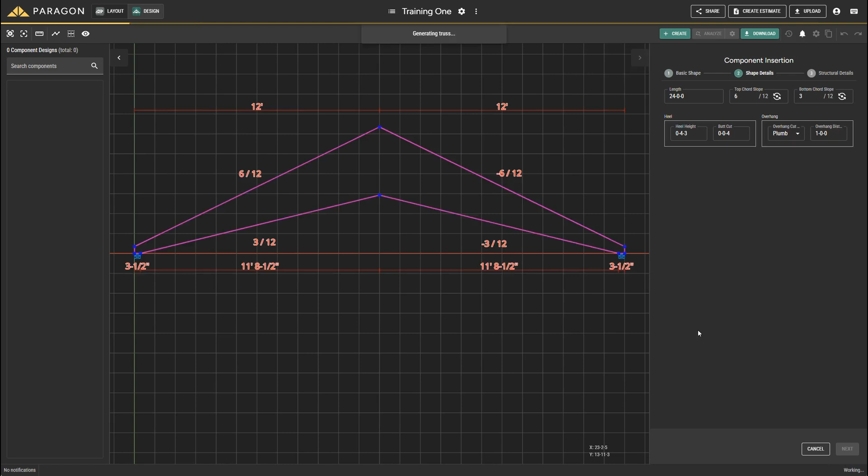Let's get started by opening the component creation panel. We'll select the scissor truss as a starting point, and use 24 feet for the length. We're going to change the top chord slope to 8/12, and set the bottom chord slope to 4/12.

Press Next and insert the component. We'll run a quick analysis, but it should pass. This is a simple example that you would commonly see in a vaulted room.

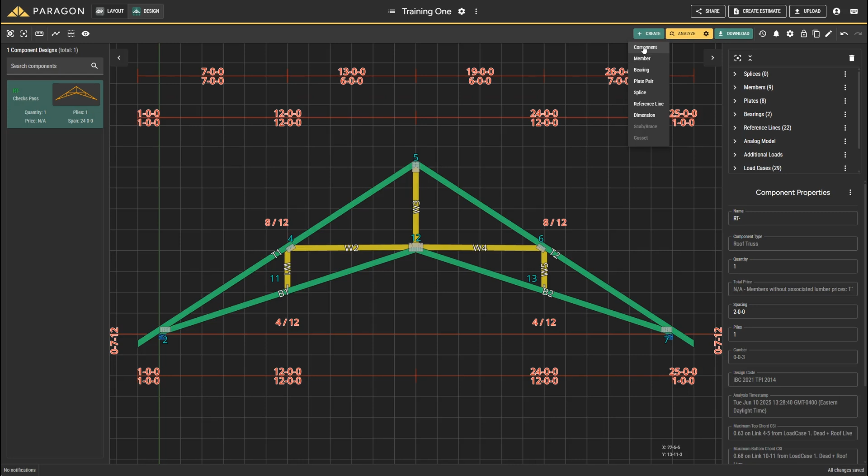Now let's walk through a more complex situation that has a vault and an elevated bearing on one side. Click Create and select Component. Here we will make sure the length is set to 24 feet.

Next, enter 12 feet to create the line, and we will set the slope to be 8/12. Press Add Line, then followed by a 12-foot line with a -6/12 slope. Click to add this line.

For the bottom chord, we want to insert an 11-foot, 8.5-inch line, then set the slope to be 4/12. Click Add Line. Next, we will click Close Profile.

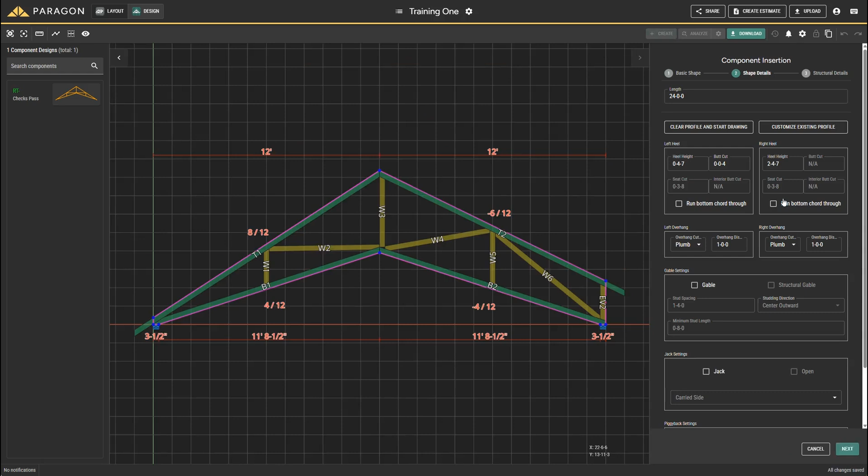We are going to set the right overhang distance to 0 in the Shape Details panel. Then click Next and Insert to wrap this part up.

Great! Now that we have this truss inserted, we need to make some modifications to get our elevated bearing. We need to remove the items that are labeled W3, W4, W5, W6, and EV2.

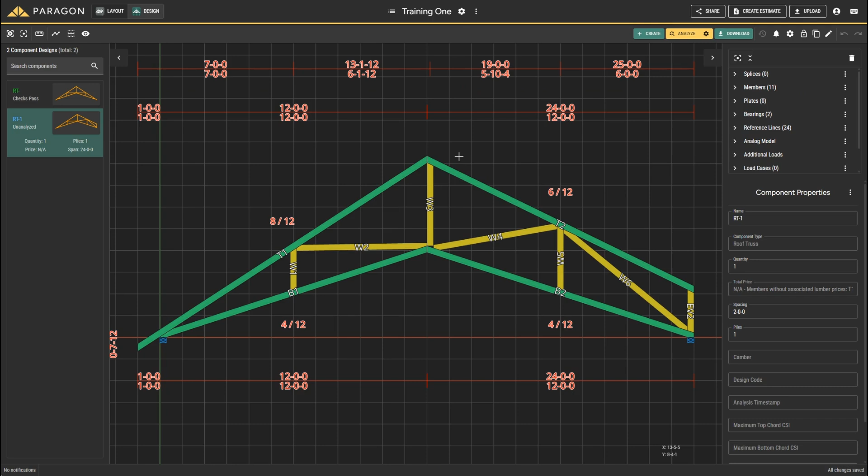Note these labels, as member labels will change as others are deleted. Remove the noted items from the component.

With those members now out of the way, we will add a horizontal member towards the right end of where T2 intersects the inside reference line for the right side bearing, and then connect to B2.

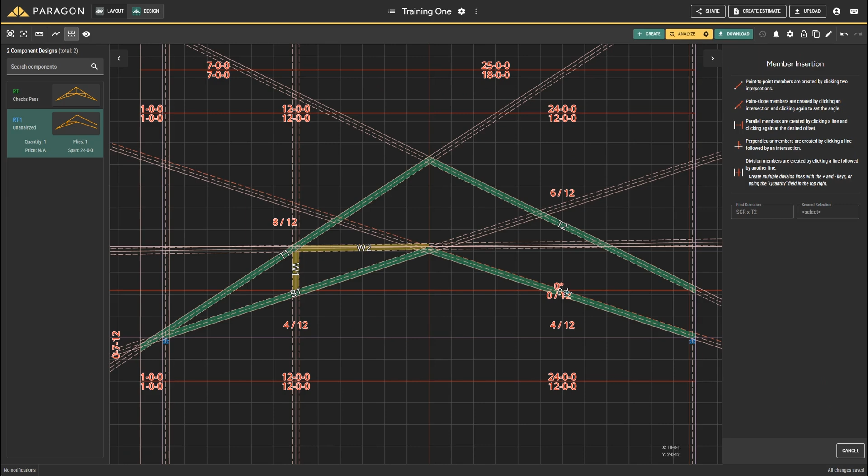Now we will insert a vertical member at this new intersection up to T2. If needed, fix the cuts so the splice is below this member.

Now we can add a member from W2 to where the inside edge of W4 intersects with T2. Next, wrap up the webs with a vertical at the center. After you start the member tool, double-click on the reference line to place it automatically.

Now we need to update our right bearing. This is an important step. If the member is not specified to be a bottom chord, bearing placement will not be possible.

To do so, convert W3 to a bottom chord. Select W3 and in the Member Properties info field for member type, set it to bottom chord.

Next, we will clean up the truss. We will trim the new bottom chord to the center of W4 by pressing Shift while clicking.

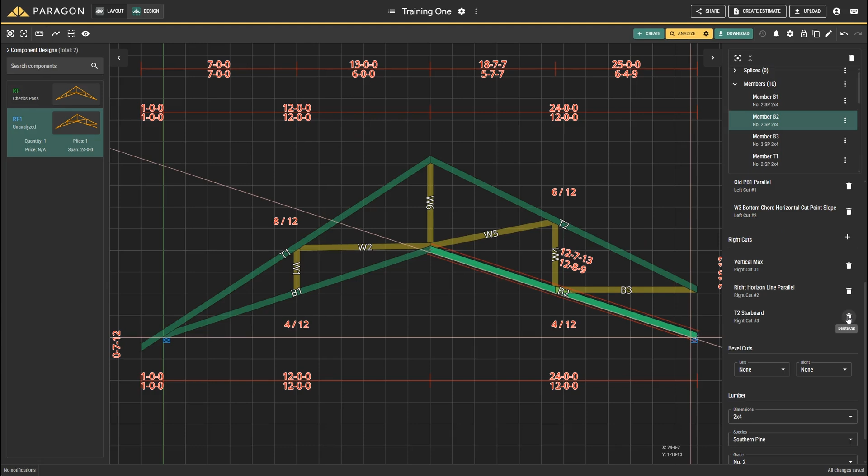Now select B2. Look at the Properties panel to see if a T2 starboard cut is listed under B2 right cuts. If it exists, select it and delete this right cut. We need to add a new right cut to the Members Properties window.

Select the middle line from W4. Next, let's delete the existing bearing.

Here we will insert a new bearing at the right end of the updated bottom chord. If the bearing jumps to the end, select the bearing.

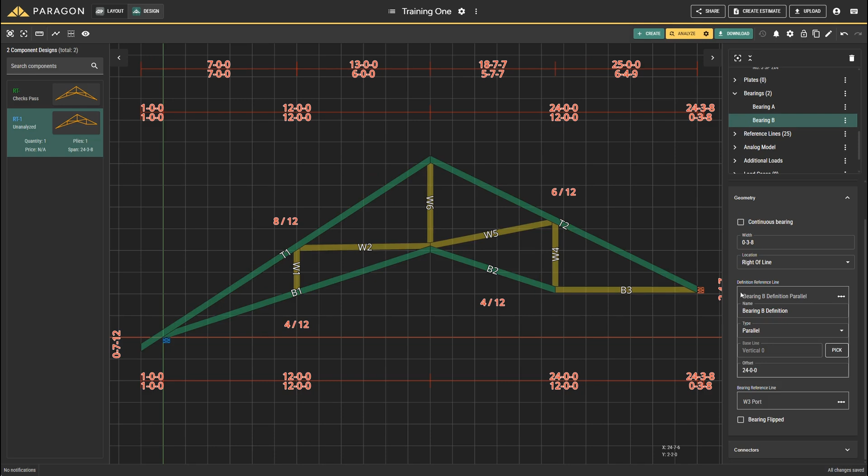And from within the Bearing Properties panel, click to check the bearing flipped box. If needed, adjust the bearing so it aligns with the right end of the bottom chord.

Next, click to analyze the truss. Great, that all worked as it should. All checks pass. That wraps up this video on working with sloped bottom chords. See you in the next one.